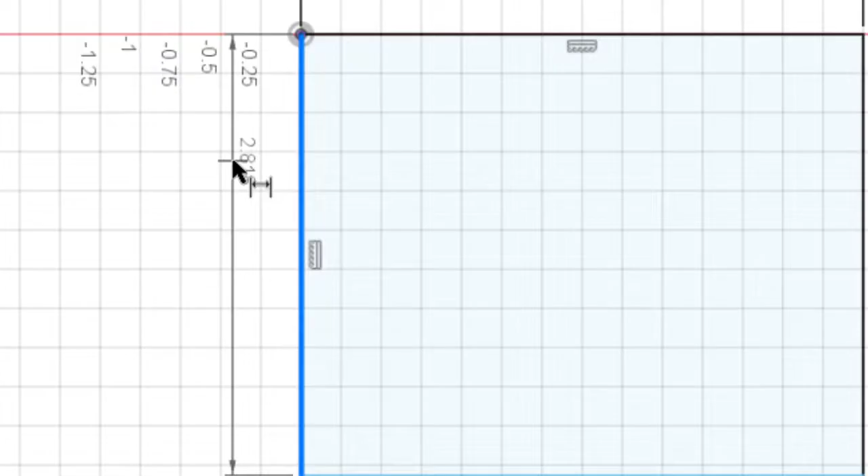I am actually going to start on the bottom, and we've got us a rectangle here. I'm going to kind of go back and forth with these drawings. Ours is going to be a little different because it just fits better for us. So it's 3.5 by 3, and everything's going to be 1/4 inch thick. So 3.5 by 3. So I'm going to hit the D key for dimension. This is 3.5. And then over here is 3. And I know I can extrude that, right? I can extrude it to be 0.25. All right, so there's that bottom piece.

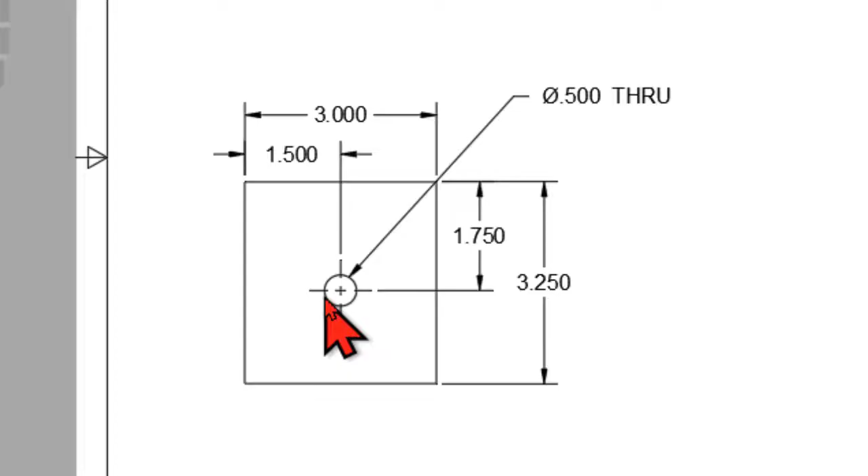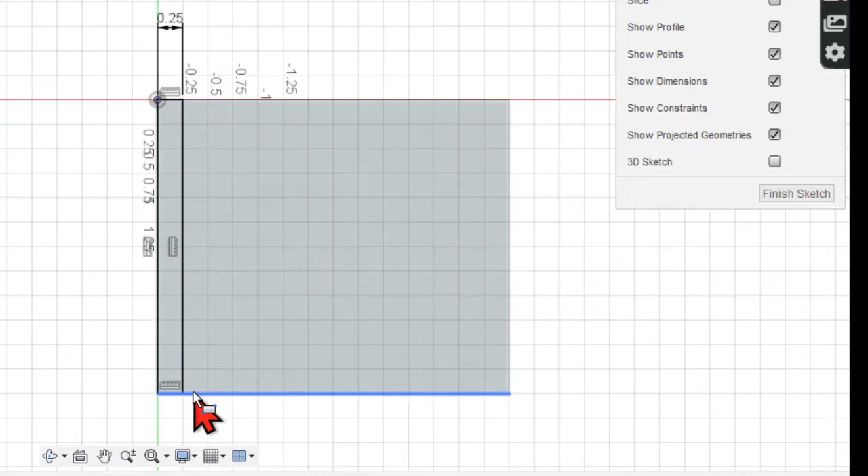All right, so let's take a look at the sides. So I think down here I've got the drawing of the side. It looks like it's 3 by 3.25 with a 1/2 inch circle, kind of centered there. So 3 by 3.25. So I'm going to say new component, right? And I'm going to say side. And now I'll come over here and I'm going to sketch. We've already got that side taken care of, right? So we knew that was 3. And then this will be 0.25 thick. Okay, and then I'll extrude this. Let me rotate that so it does a little bit better for us.

And on this we said, let's go back to that drawing there. We said 3.25. Let me edit that extrusion and say 3.25. Alright, now I'm going to put the hole in. So I go up here to hole. Alright, so let's look at the drawing. It says 1.75 from the edge and 1.5 from that edge.

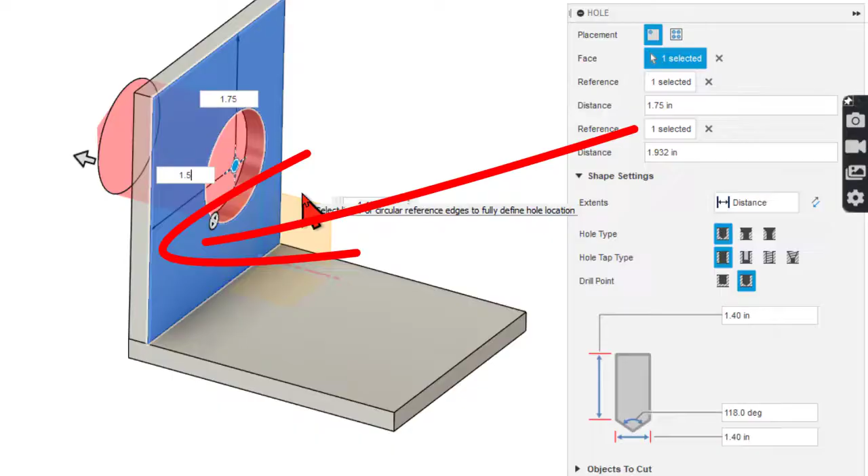So here's the hole. We know from this edge it's supposed to be 1.75. And then from another edge, so I'm just clicking reference. From there, that should be 1.5. And the hole itself, the diameter of that hole, which is right here, instead of 1.4, which they've given me, I need that to be 0.5. Right, and then I'm going to hit enter. And that side is taken care of.

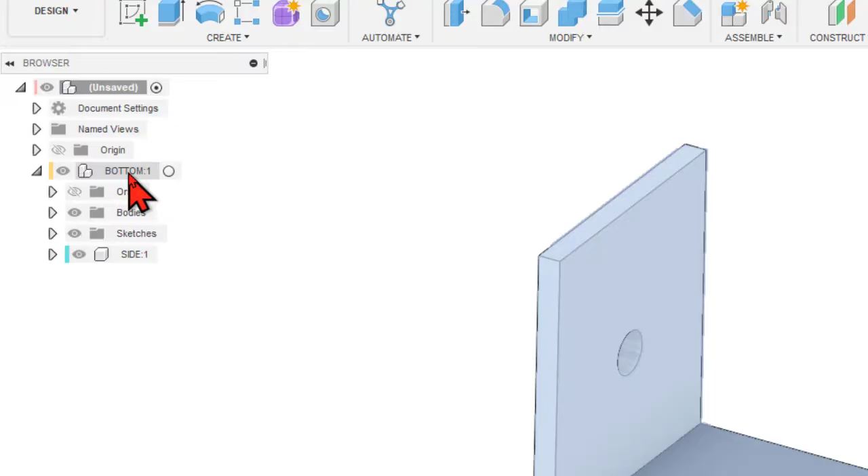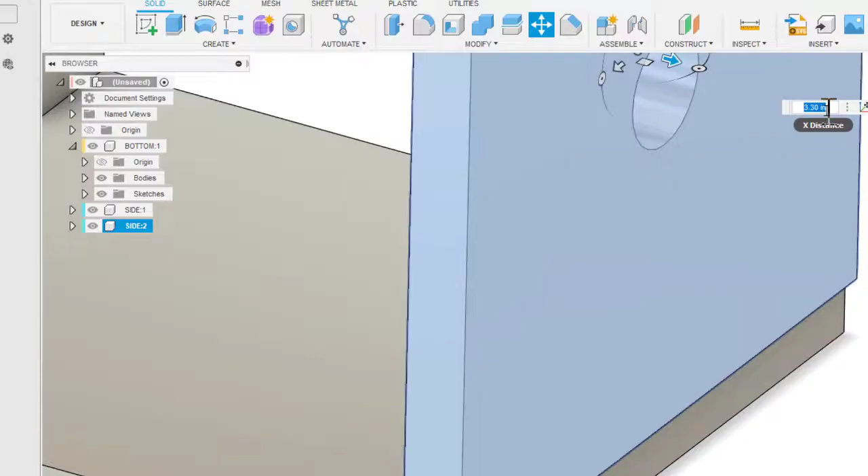So I'm going to go back up here and I'll get the whole parent view. Now look at that. Side came in under bottom, didn't it? So I'm going to click and drag that up here. Now this side, I'm just going to go ahead and right click on it and say copy. And I'm going to right click and say paste. I'm just going to kind of drag this out and put it in position. I'm going to kind of line it up with the edge. That's 3.3. If I go back, it's 3.2. So this must be 3.25. Yep. And I'll hit OK.

I'm going to do one more new component, and I'm going to call this the top. So there's the top. I'll do new sketch here. And I'm going to just drag the rectangle across and make it meet in the corners. And I'll extrude all of this. And that also will be 0.25. Now we do have some holes in here, so let's check that drawing out. It looks like 0.75, 1.75, and 2.75, and then they're centered. And it looks like they're just 1/2 inch holes through. So I'm going to go ahead and take care of that.

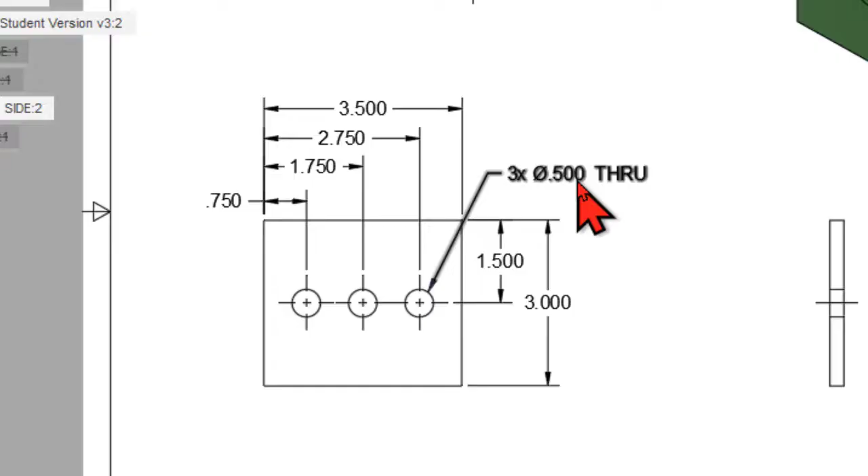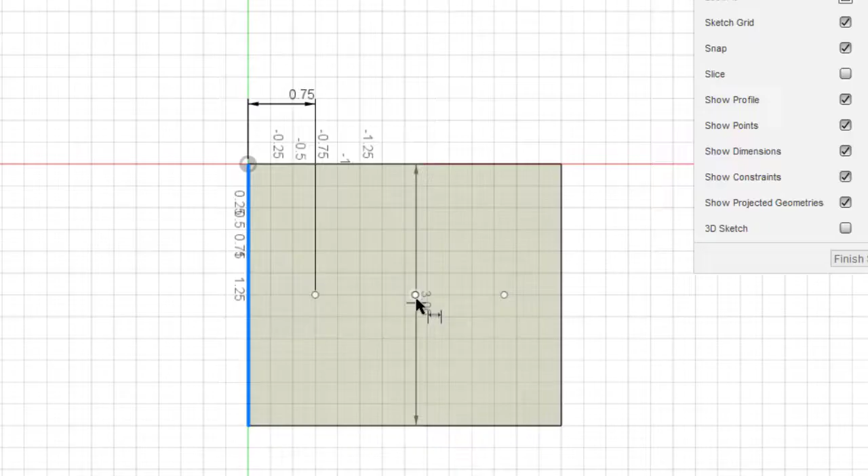I'm going to do this just a little different. I'm going to go into sketch, and I'm going to create, and I'm going to say point, because I'm doing several at the same time. I kind of find the midpoint, and I know that they're just in here, right? I know from the drawing it says from this edge to this edge was 0.75, and then from the edge to the center one I think was 1.75, and I always forget that last one, but it looks like 2.75.

So let's go ahead and take care of that as well. So I'm going to go from the origin over here to the dot, and that'll give me 2.75. So all of those are set. So now I'm going to hit finish sketch and I'll go to hole.

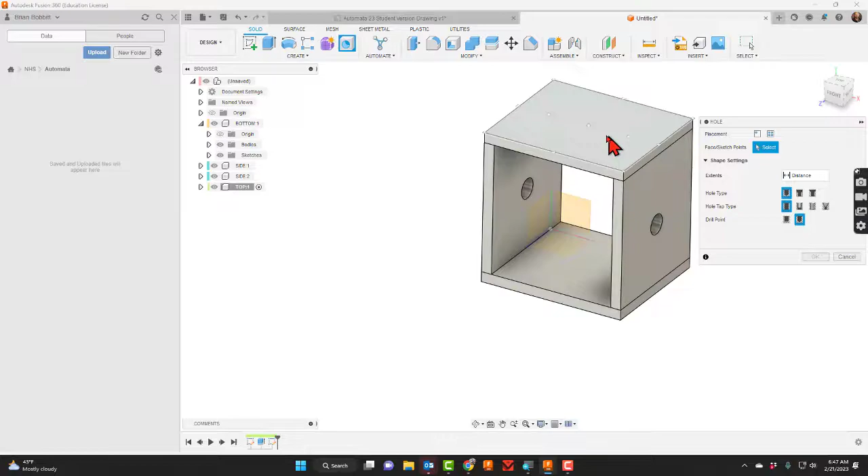Now the nice thing is I can click all of these at once and set them to 1/2 inch. Now really on our depth, the main thing is that they go through, right? And I'll hit OK.

Now I'm going to go up here to the very top where it says unsaved, and I'm just going to highlight everything. Okay, so right now I want to show you this. Everything is going to move, right? Because we never did joint anything. So I'm going to undo that, and I'll show you a neat little trick.

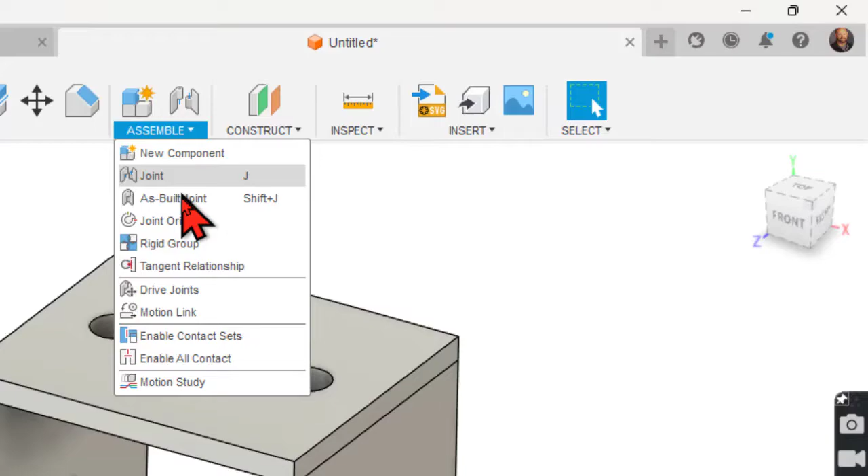I'll go up here to Assemble, and I'm going to say As Built Joint. We're used to going to joint, but here's As Built. It only will let you do 2 at a time, to my knowledge. Hit OK. I'll go back up there and say As Built Joint again, and I'll say here and here. So I'll get those 2 corners. Okay, now if I drag it, see that side will move and that side will move.

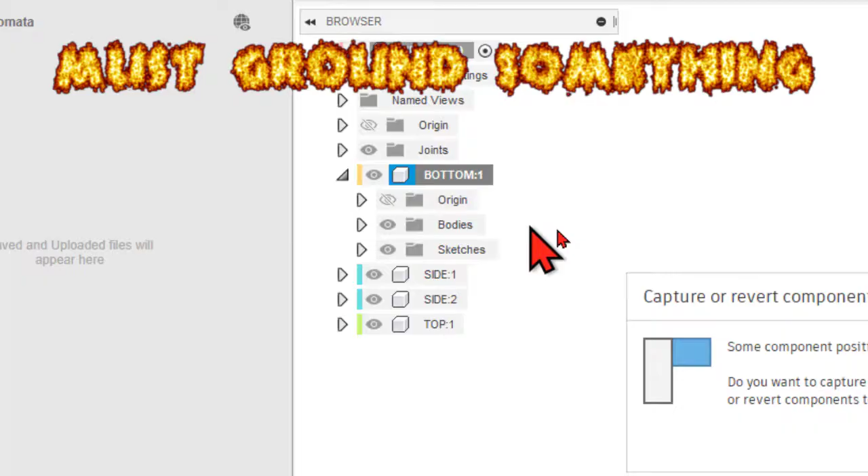So close, right? I'm going to put one more in, and I'll say As Built Joint. Let's do here and here. And just to be for sure, we'll go here and here. All right, now before I get going crazy though, I'm going to take the bottom and I'm going to ground the bottom. Okay, so now nothing's going to move that's attached there. And let's go ahead and start working toward getting some other pieces in here.

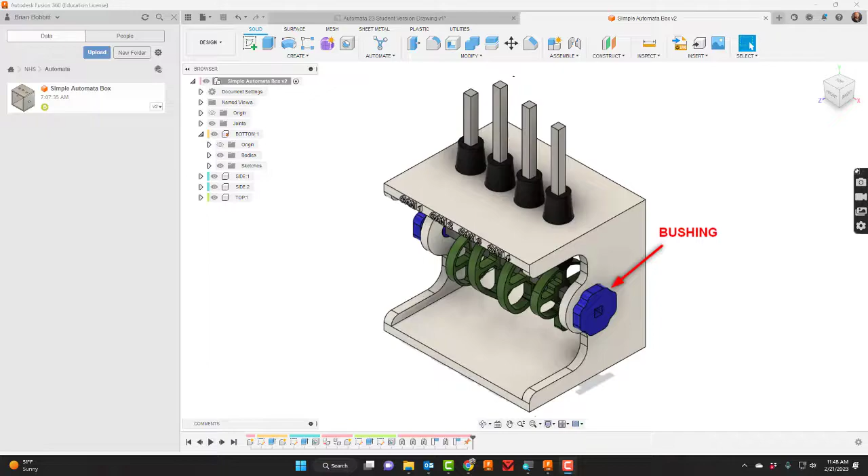Let's go ahead and demo how to do the bushings. Those are the knobs that are on the side of it. So I'm going to say new component, and I'm going to call this the bushing. I might just call it the bushing / knob, because I'm going to combine these two to make it a little simpler process. So I'll go ahead and do the new sketch thing. And I'm going to come in here, and I'm going to actually use the circle that's already there.

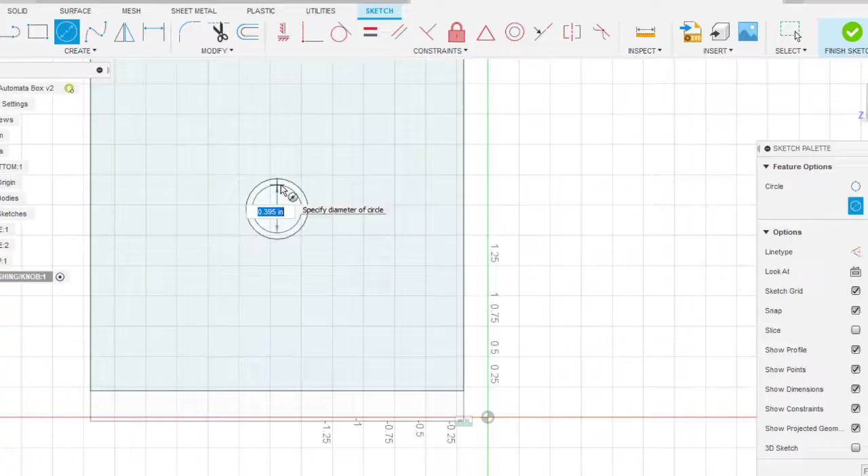Now, because in reality, I know that I'm going to 3D print these, I want it to be slightly smaller. I need to have some clearance. I know that that hole is 0.5, so I'm going to actually type in 0.5 minus 0.03. And that should give it the clearance we need. That 0.03 could be different depending on the printer, right?

So I'm going to extrude that. Let's rotate it so we can see it. This actually needs to go this way, doesn't it? And it would need to go negative 0.25. And that would fill the gap. And then I'm going to come out here and I'm going to sketch a little bit more on the top. So now I'm going to create that knob piece.

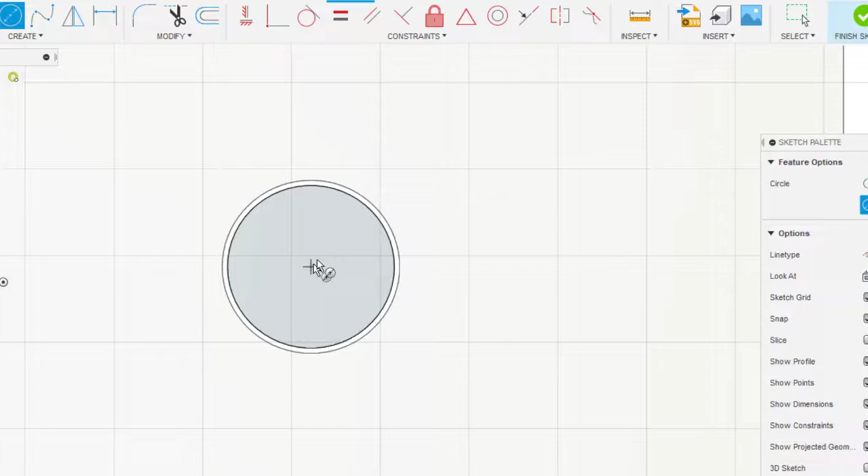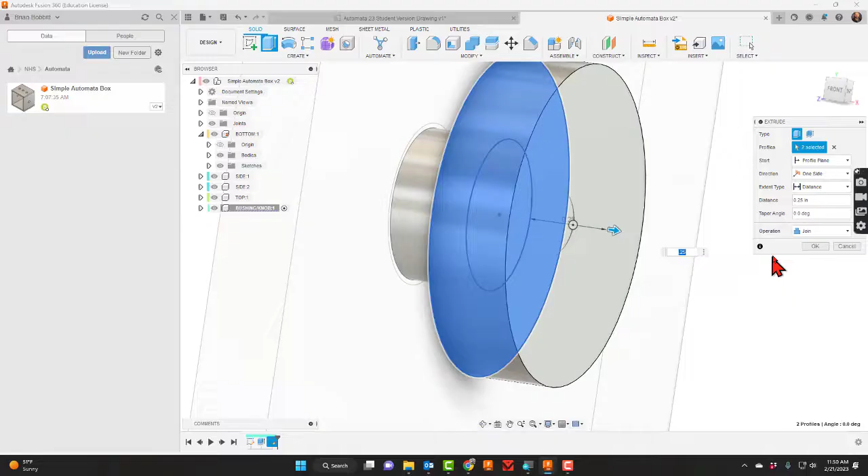So here I'm just going to try to keep that. Let's make it like 1 inch. I believe that ought to get it. And I'm going to collect all of these circles here. And let's make that maybe, what, 0.25 thick? Something like that. Go ahead and hit enter. Right, and now I think what I'll do is I'm going to go back in there.

I need to put a square hole through there. So I'm going to go to create and I'm going to say rectangle, and I'm going to say center point or center rectangle. So I'm really going to find the center of this again. Now again, this should be 0.25 by 0.25.

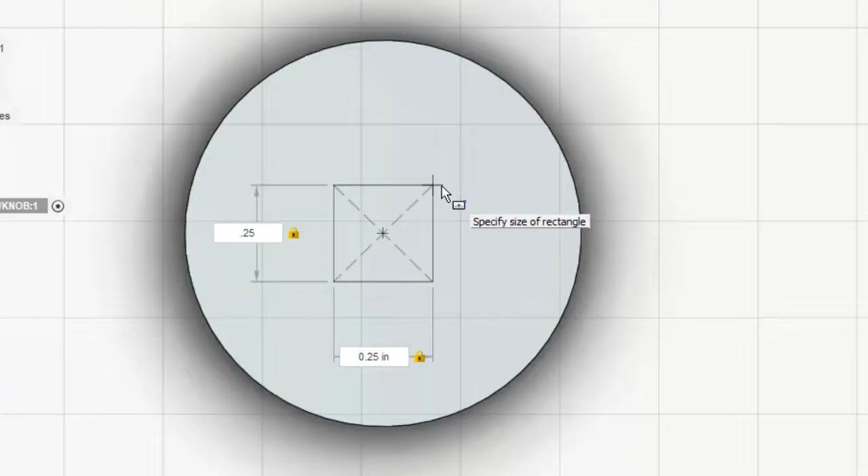Right, that would be perfect in a perfect world, but we know with 3D printing things can swell a little bit. So I'm going to say 0.25 plus 0.02. Then I'll tab over and do the same thing here, 0.25 plus 0.02. And that'll make it slightly larger so that everything should pass through. So what I'll do now is just extrude it, and I'm going to cut it all the way through. Okay, so there is a bushing.

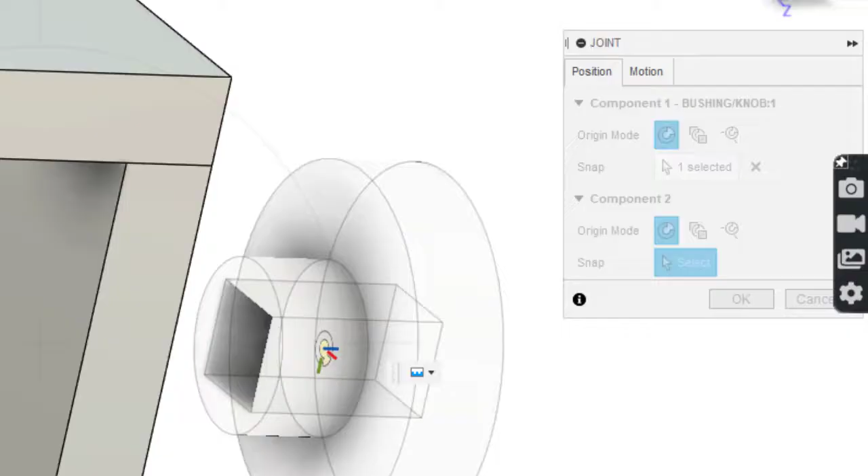I think I'm going to go ahead and pull this out. I'm going to joint the thing. So let's go ahead and go up here to joints. And I'm going to get the center of that and put it on here. Okay, on this one, I'm going to go ahead and change this motion over to revolute. So that allows it to spin.

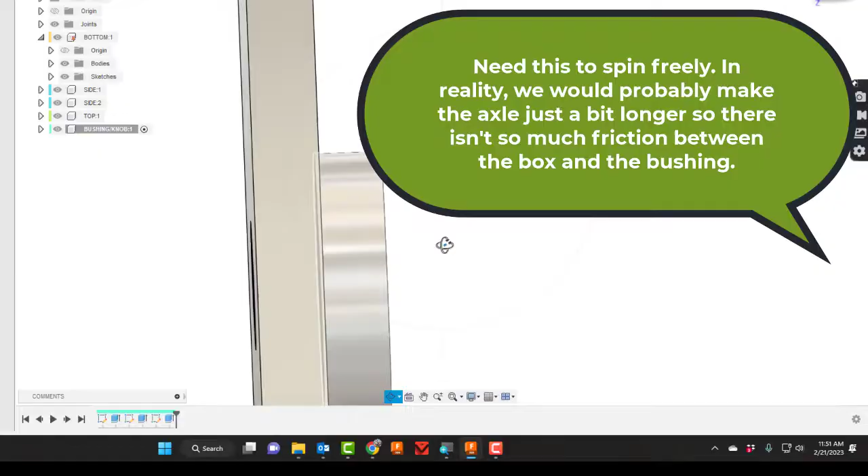So I've got that. Now, if I'm looking at that, probably should leave a little bit of clearance. But in reality, what's going to happen is because we have a wooden axle running through here, that's going to have a little bit of play to it, and we can back that off, or we can pull the knob out some.

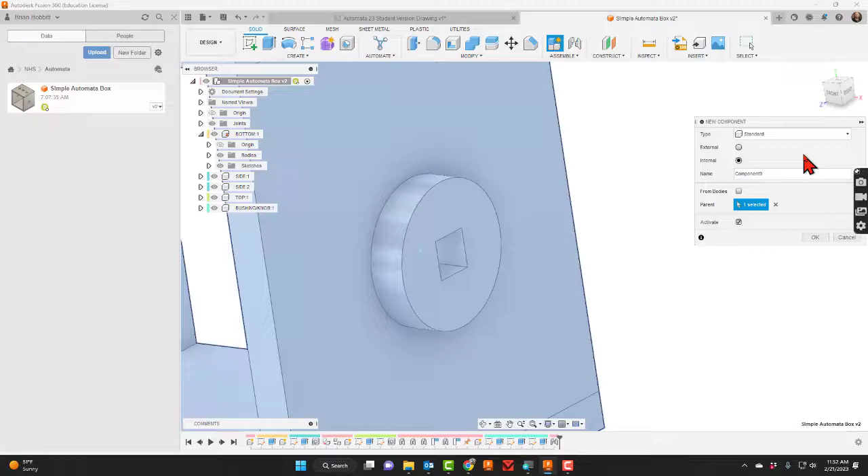All right, let's go ahead now and create the axle. So I'm going to make sure I've got the whole assembly right. So I'm going to go back up here, and I'm going to say new component, and I'm going to call this one the cam axle.

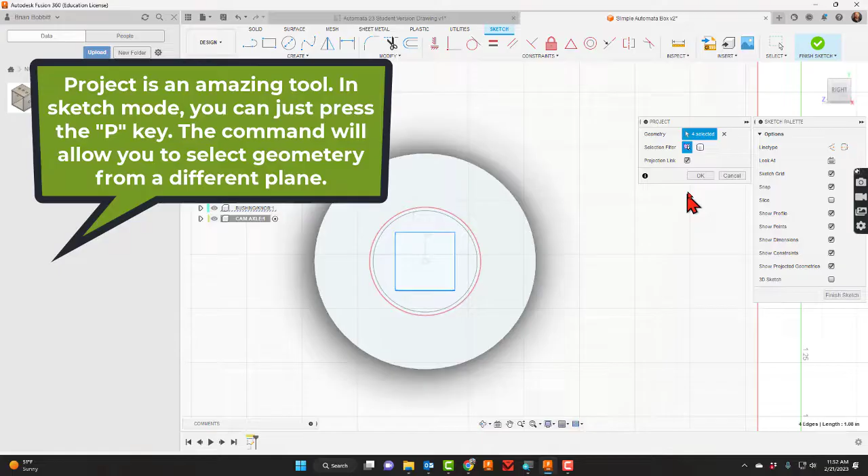New sketch, and I'm going to sketch on the outside of that knob. And on this one, I'm just going to hit project and use the square that I've already used. So I can either go up to create and choose project, or I choose to press the P key, and I'll hit OK. And all I've done is just select the lines that were on the square.

So now I'm going to extrude that shape, and I'm going to go all the way to the other side. So let me square it up. There's the front view. If I drag this arrow, that's perfect at negative 3.75. I need to remember though that I have to add that extra 1/4 inch, right? So let's make that -4, because I'm going to also have another knob over here, aren't I?

Go ahead and go back up to the entire assembly. I'm going to go back up here to assemble and say as built joint, and I'm going to click the knob here and the axle and just keep that as rigid. So now when I turn this, you see everything is going together, right? The circle is turning, the axle is turning.

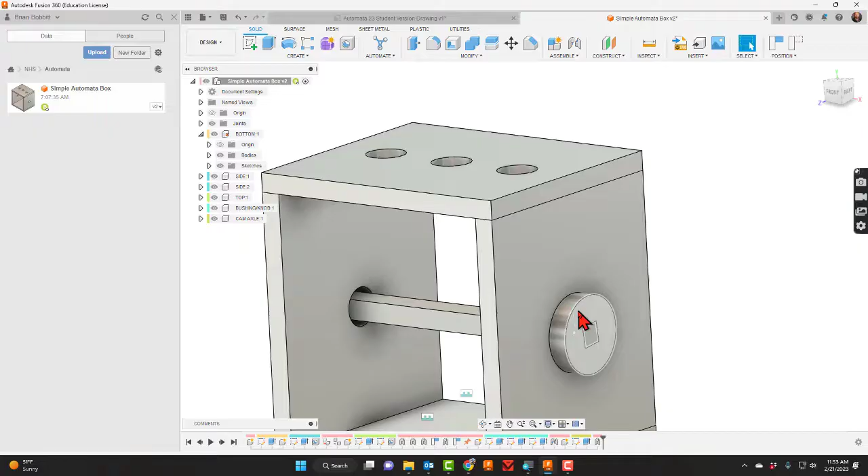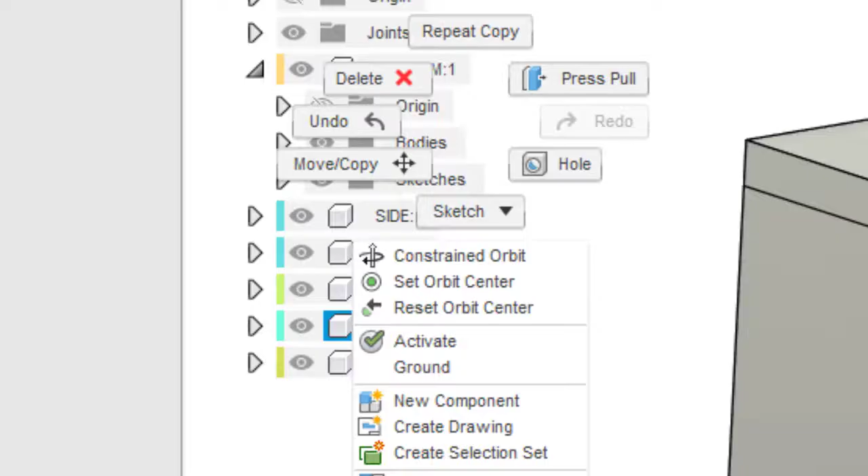Okay. I'm going to right click on this joint, and I'm going to say go to home position. So that'll reset it. While we're here, let's go ahead and put the other bushing handle on there. Right here, there's the bushing knob. I'm going to right click on it and say copy. And I'm going to right click and just paste it. And I'm going to pull it out over there. And I'm going to joint it.

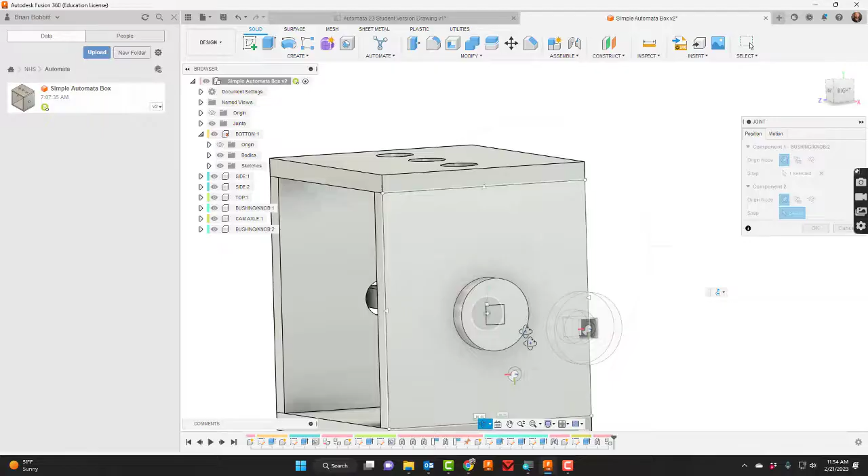I'm going to put the end of this, so right in here, if I hit the control key, remember that'll leave it up. And I can select on that central button there. So there that is. And now I'm going to rotate it to the other side of the axle. And click there. Now I need to flip it. Now I don't know if you noticed, but on the motion, that thing was turning. So let's go to motion, and instead of revolute, let's make that rigid. So I'm going to hit OK now.

And now I'm going to come over here to this knob and I'm going to turn everything. So you'll notice when I turn that this knob over here is turning as well.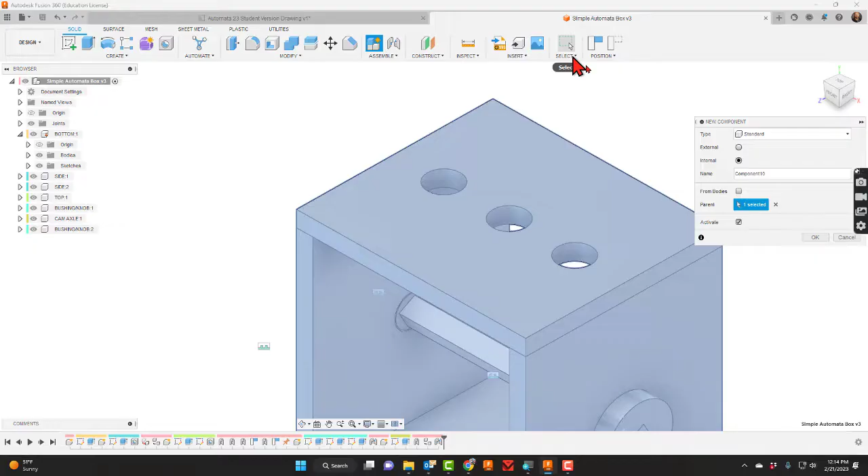So next up in the process is to put the guides up here on the top. So let's go ahead and get those drawn in. First thing I'm going to do is say new component, and I'm just going to go over here, type in guide. Okay. Now I'm going to come to the top and start a new sketch, capture the position. This was going to be a relatively snug fit, but let's go ahead and make that dot.

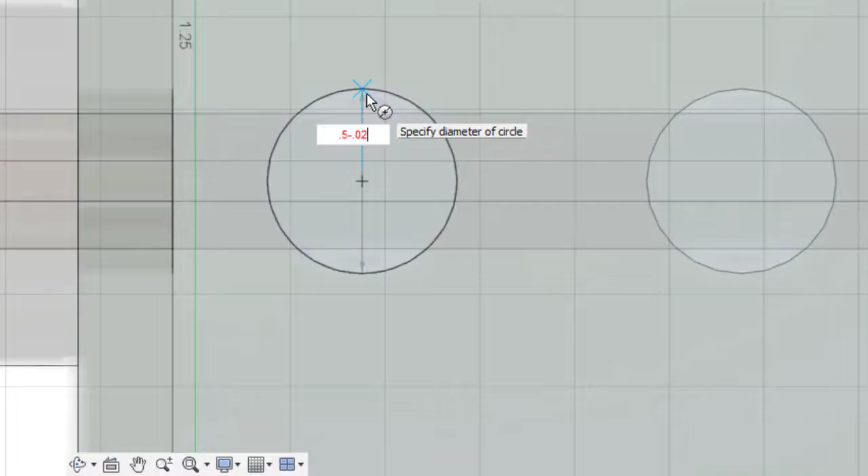Now remember, again, this is probably going to be another 3D printed piece. So instead of 0.5, I'm probably going to say 0.5 minus 0.02. Okay, just a little bit of tolerance there, because we do want this to be rather snug. So I'm going to hit extrude now. And we'll click there, and we're just going to take it down through the top, right? So that should be negative 0.25.

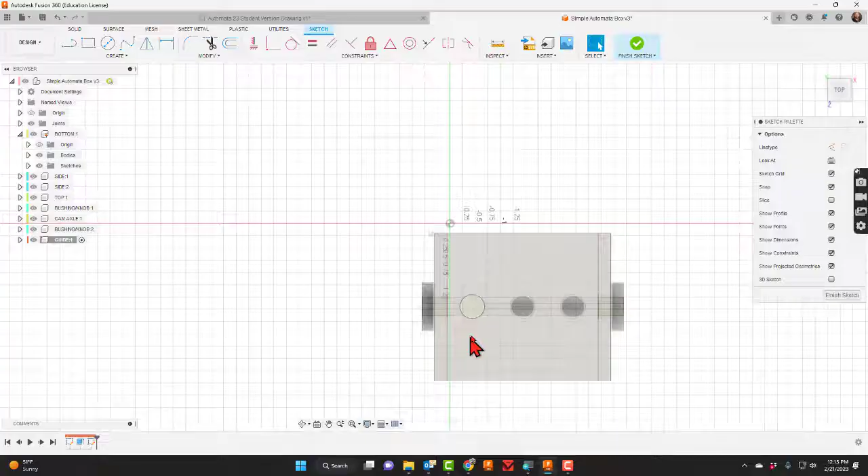I'm going to come back up on the top of that. And I'll draw one more circle here, and that one needs to be slightly larger. So let's make that 0.75. And this is where things can get a little tricky here. We're going to make a loft here.

So I'm going to finish the sketch, and I'm going to grab a plane up here. And I'm just going to click on this shape, click and hold, or click, and then I'm going to drag this up to where I want it to be. Let's make that a 1/2 inch tall.

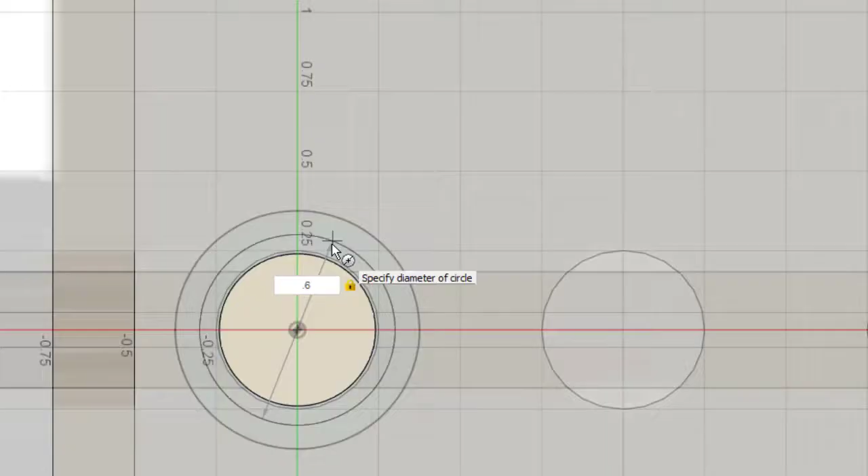So just to show you where we're at here, I'm in a separate workspace or a work plane. Now I'm going to go to sketch on that new plane, and I'm going to put another circle up here. Now I need these to be numbers that are usable. So like the 0.585, let's try like a 0.6 here. And then we'll hit finish sketch.

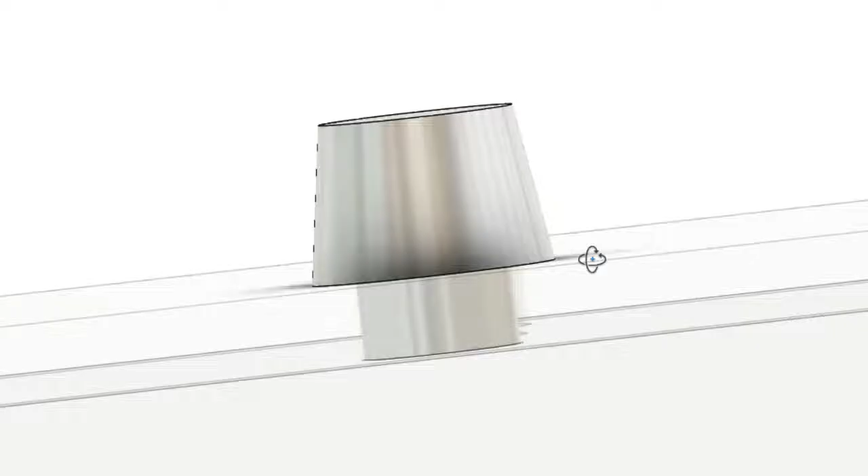So now I'll go to create, and instead of extrude, I'm going to go to loft. So I'll click here and then up here, and that will give me that lofted shape. The nice thing is when I 3D print that, I'm probably going to 3D print it upside down. So in other words, this would be the bottom. Okay, and what that'll allow me to do is 3D print it without supports.

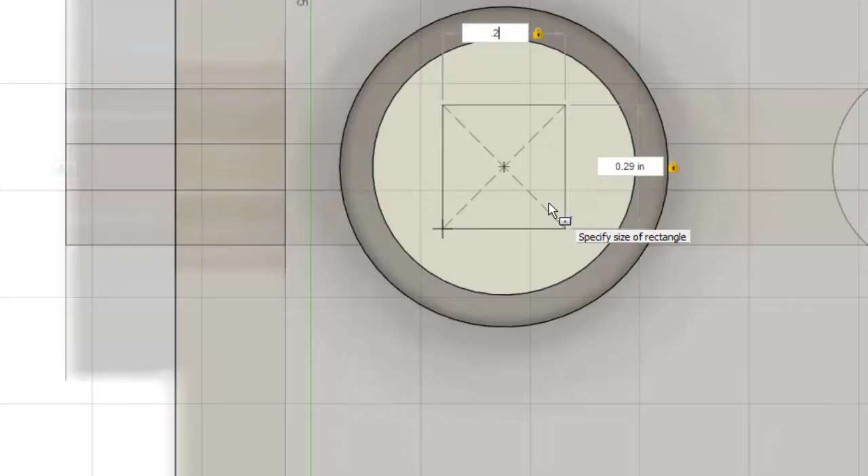So now I'm going to come in here onto the top, and I'm going to use that center rectangle. So rectangle and then center rectangle. I'm going to find the center of the circle again. Now we know that the wooden dowel rods are 0.25, so this joint in particular needs to do some sliding. I think I'm just going to jump up to 0.29 on both of them, because it's okay if we have a little extra clearance here. Remember, we really want that to be free.

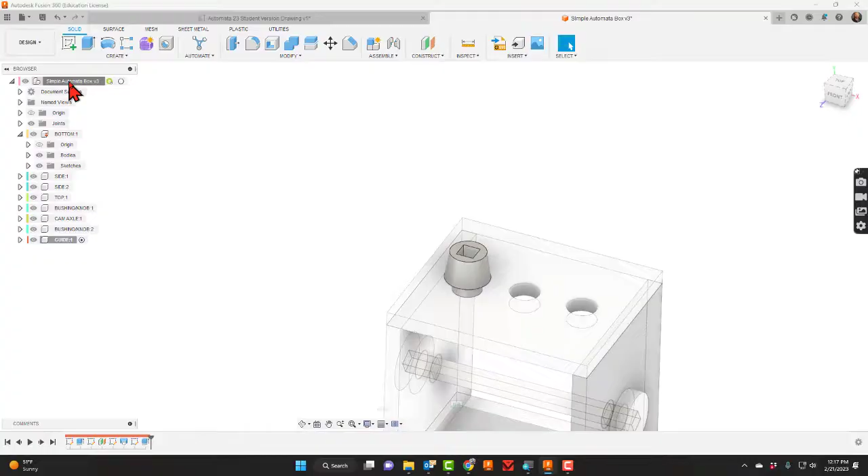So now if I come in here, I can say extrude. I'm going to take it and go all the way through that shape. I'd say 1 inch ought to get it. There it is. So I'll go ahead and get back up to the entire assembly. And I think what I'll do now is I'll go ahead and go to Assemble and say As Built Joint. So I'll click here and here. And that should be good. So this is not going to move.

I think from here I'll go ahead and copy that over. So copy. And then I'll paste again. Just kind of scoot this over into its place. Let's rotate that and see how it looks. It's a little bit off, isn't it? So let's go ahead and move it over. That looks good, and hit OK. Again, I'll go up here to Assemble and say As Built Joint, and click here and here.

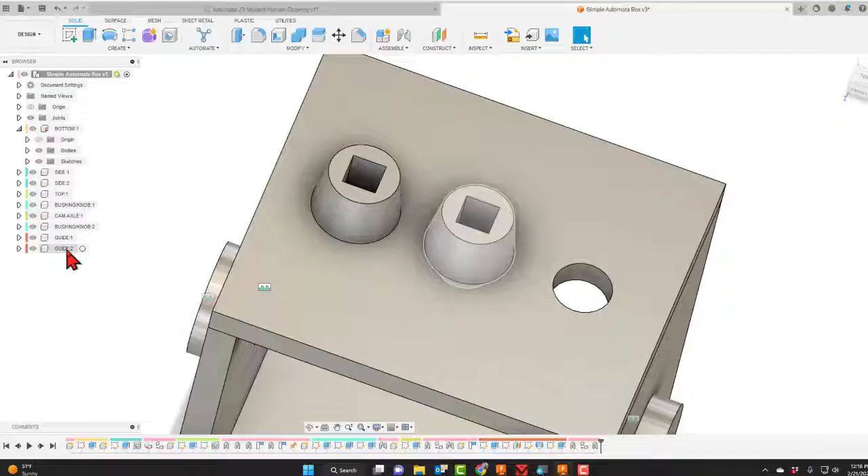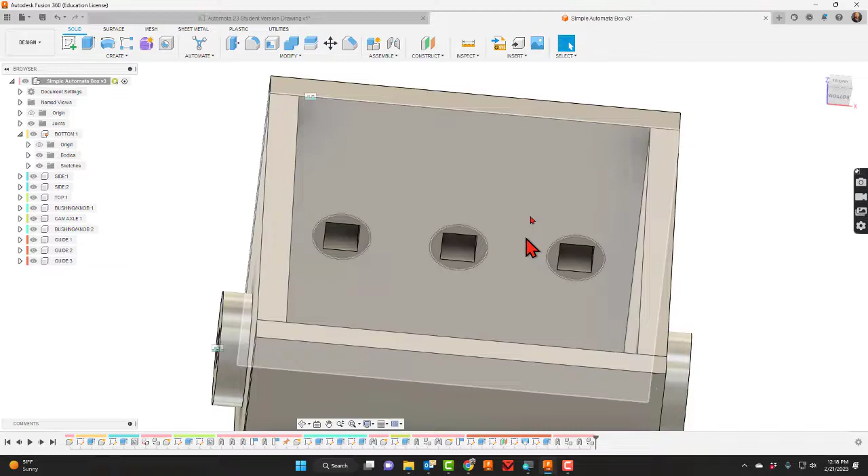And do one more. So I'll come here and copy it. And I'll do one more paste. Right click and say Paste. And just scoot it over. It looks like every inch ought to get it. After I move it over the inch, I'll just hit OK. I'll go ahead and join it. So Assemble, and then say As Built Joint, click that, and click that, and then you're good to go. So now that takes care of the guide process.

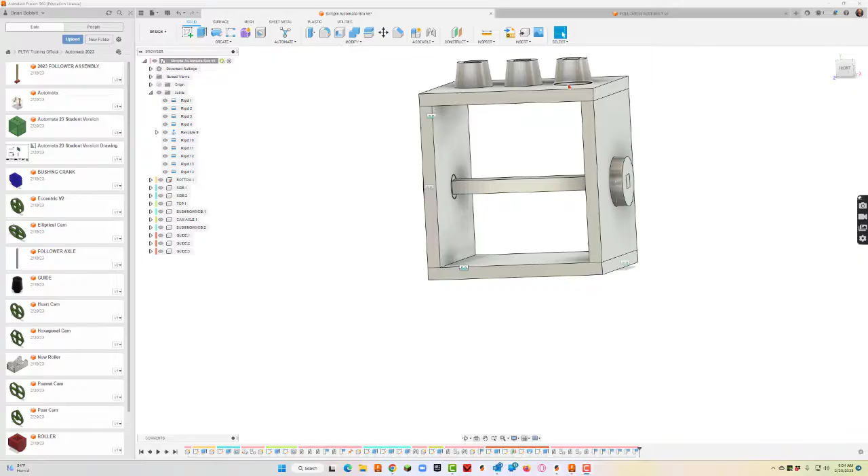So next up in the process, we're going to start to put our follower system in. So we're going to put an axle through here and a little follower at the same time. So let's take a look at how to do that. Alright, so we're going to come over here and we're actually going to start our parts out here separately. So I'm going to say new component, and I'm going to call this the follower axle.

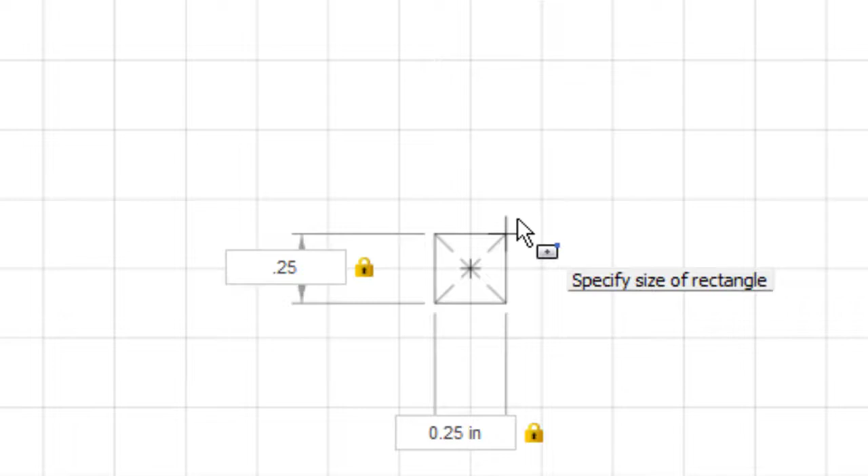Come out here with a new sketch somewhere. Let's try to keep them separate. So I'm gonna go to rectangle. I like the center rectangle, and let's make it 0.25 by 0.25 because this is gonna be a wooden axle. Let's go with like 3 inches on that. All right, so I've got one piece taken care of. Now I'm gonna put like the follower tip on there. So this is what the cam is actually gonna roll on.

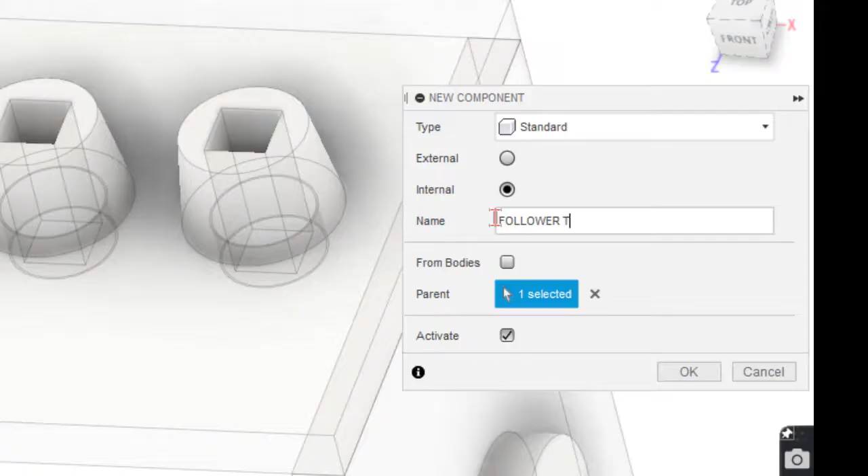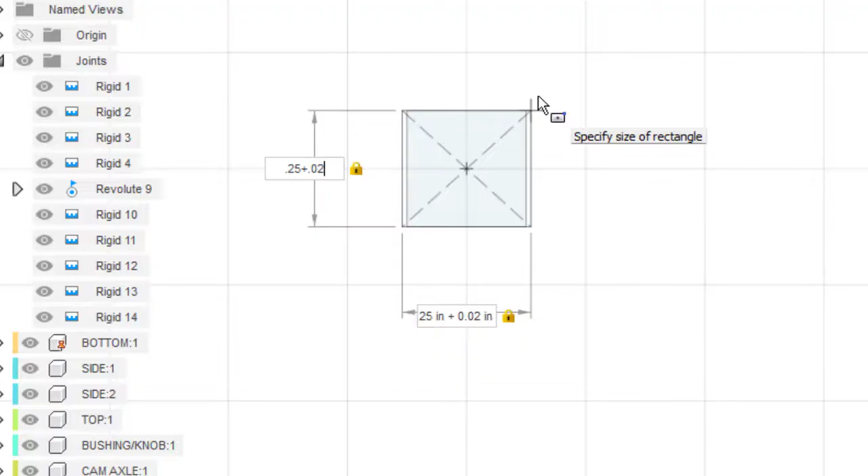So this is going to be another new component. So new component, and let's call this one the follower tip. So I think I'll start right here on the end of it. A rectangle that's slightly larger. And another thing I could have done is use the offset here. So I'm going to say 0.25 plus 0.02. And I'll go back up here to the other one. So tabbed over. The same thing, so it's going to be slightly larger. That's kind of a big deal.

Now I am going to use an offset, and I'm going to go off of the square I just made. I'm going to go with like a 0.1. Hit enter. I'm going to extrude that and take it up a little bit so that it wraps around that. And it's got to go up there a little bit. I'll say just like 0.2 is fine. Now I'm going to hit sketch and come back on top of that.

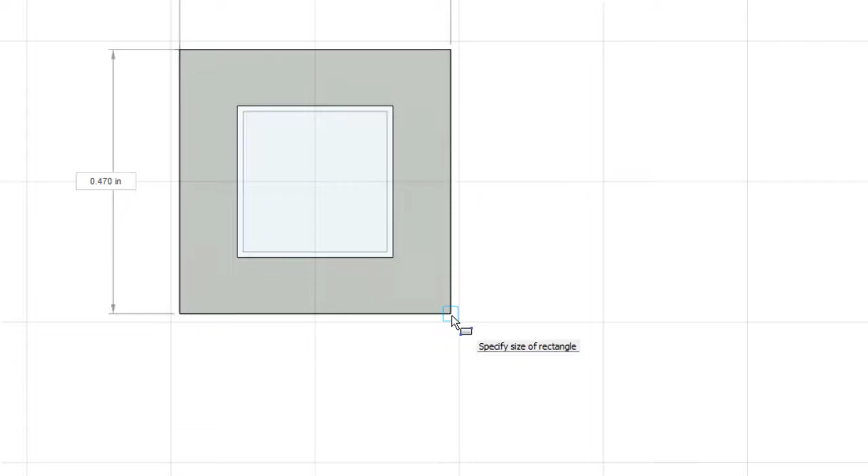And let's draw just a rectangle here across the whole thing. And now we'll extrude everything up here. So let's drag this out some. I'm going to go with like a 0.2 here as well. Now what I'm going to do is I'm going to fillet. So I'm going to choose my fillet tool and come get this corner and this corner.

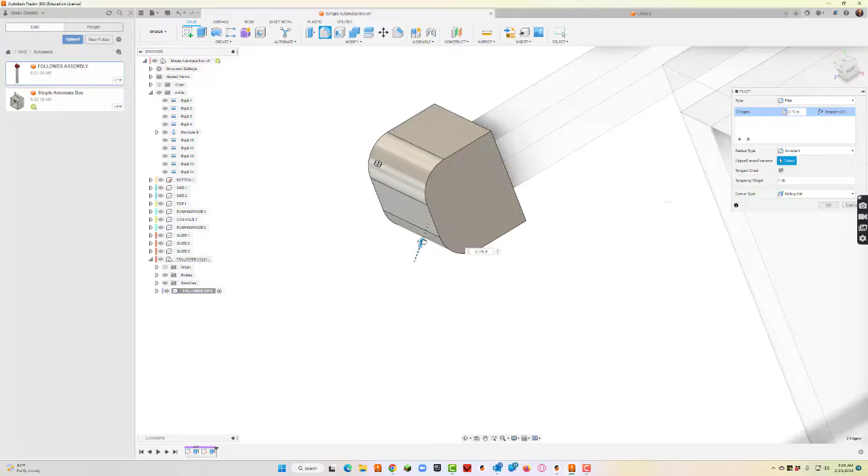Just kind of push those in as much as I possibly can. I really want that to be round. Looks like as soon as I go from 0.225 to 0.25, it gets really nasty. So let's try like 0.235.

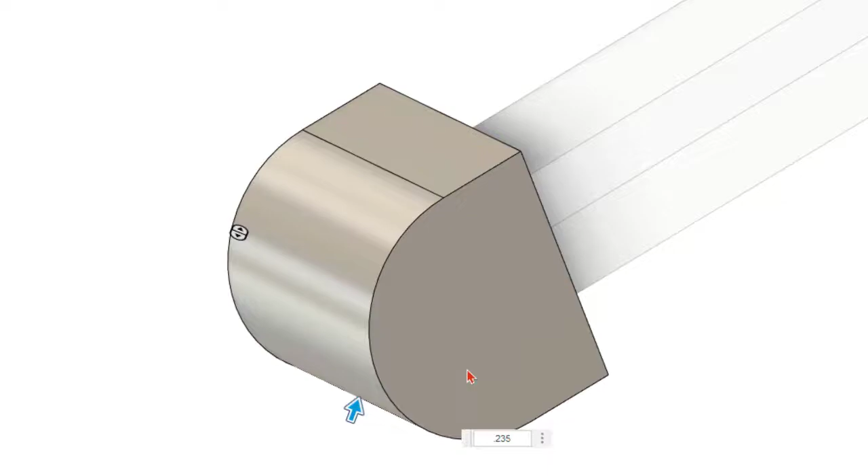That actually works really perfect. I want that to be round, so I'm going to hit OK. And also while I'm here, I'm going to go ahead and make this a different appearance. This kind of helps me here because it's going to start getting pretty convoluted pretty quickly. So I'm just going to drag like a red over there and close.

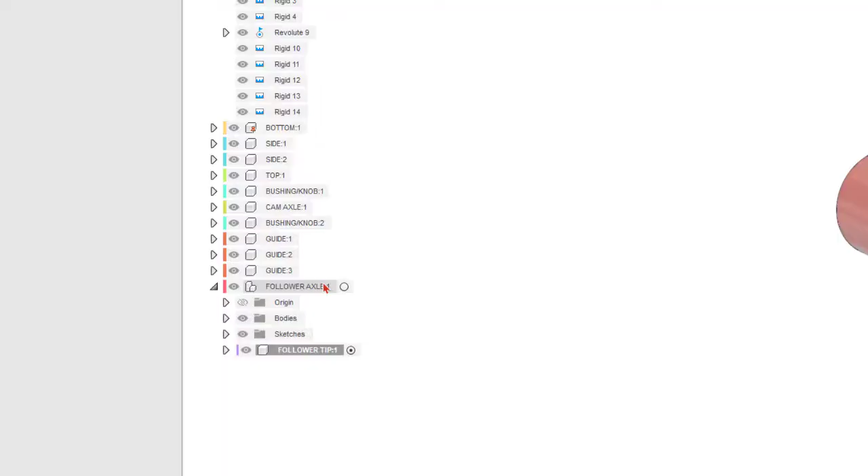Now, before I move on, I want to come up here and get to this assembly here. And I want to go ahead and do an as-built joint. So I'm going to click the tip itself and the axle. Hit OK. And now these two pieces are together. So this is an actual assembly now.

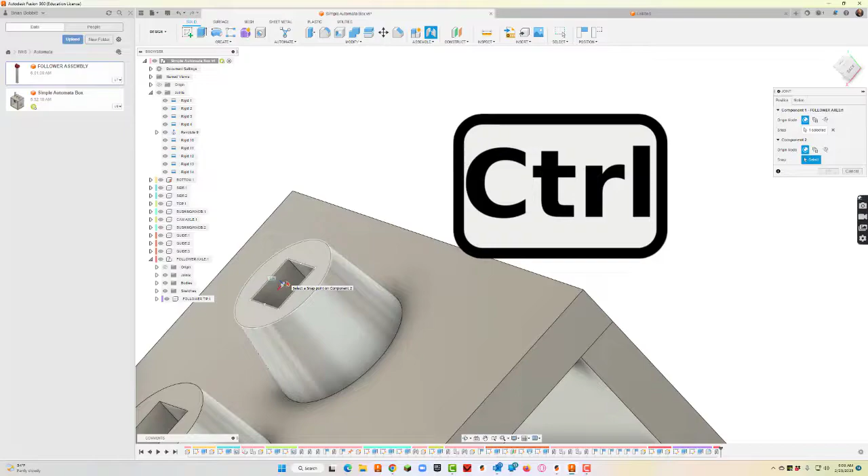I'm going to go ahead and activate the entire automata now. So I'm in here, and I'm going to put a slider joint in. So I'm going to go up here and choose joint. I'm going to pick the end of that, and I'll come up here to the guide. Probably have to hit the control key, but there it is. Go over here to motion, and I'll choose slider. That's actually moving the way it's supposed to.

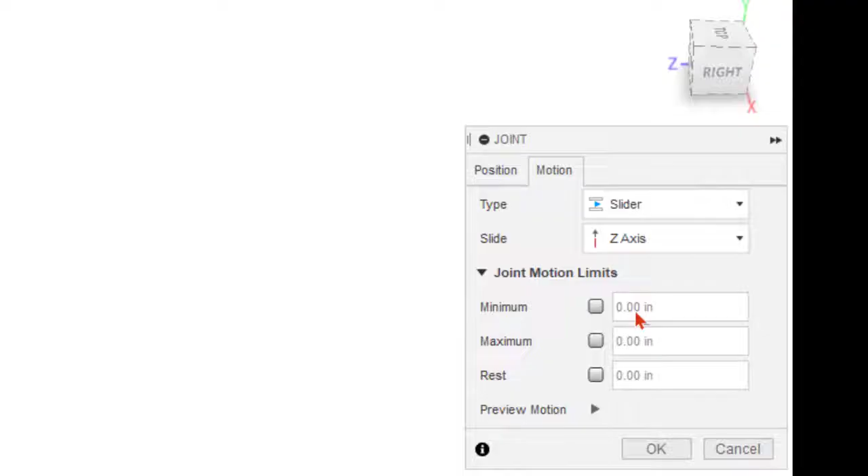See, it's moving vertically. If it comes in like this, where it's going across or this way, I just need to go up here to slide and change the axis. Okay, so there it is. Now I hit that, and you notice that that thing is upside down, and that's okay. Let's fix that. So it's going to be the last joint we put in, right?

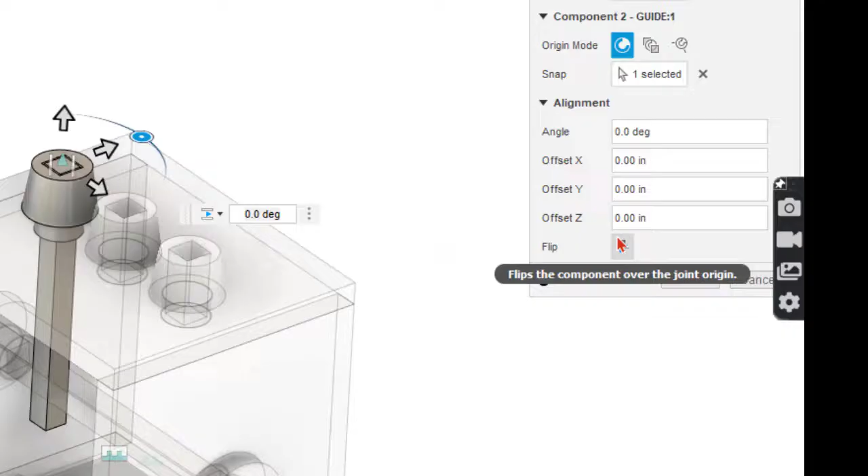Here's the slider. So here's our joints. Here's slider. I'm going to right click on that and say edit it. And what I need to do is just flip it. So just flip, and hit OK. Now if I take a look at that, it's moving the way it's supposed to move.

Alright, so let's take up from here. We've got our follower axle and our follower tip system in, our guide tip, whatever you want to call that. Now we're going to actually put a cam in here. So let's do that. Let's go over here. I'm going to say new component, and let's do an eccentric cam. It's pretty simple to do. We'll start over here with a new sketch. So I'm just going to kind of draw it out here.

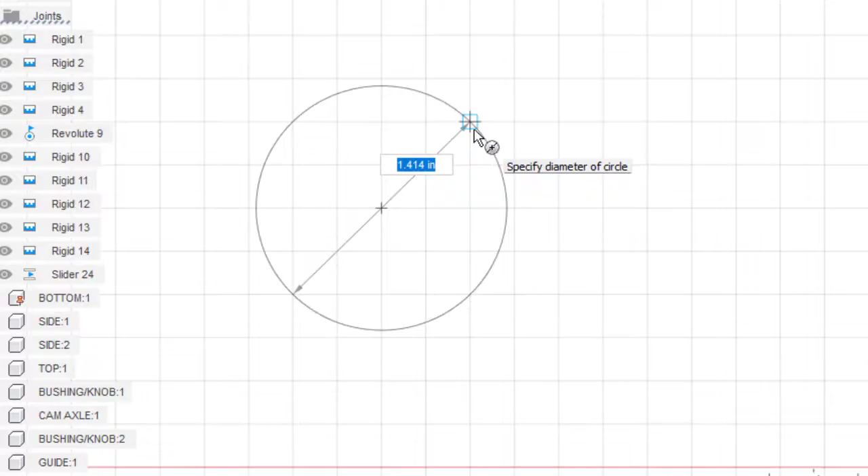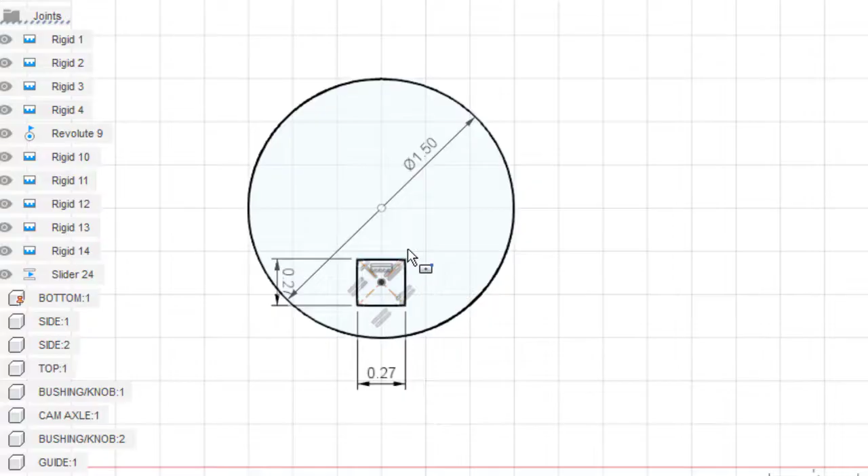For our cam, I think I'm going to make the nominal diameter be 1.5, and then I'm going to use the center rectangle. I'll come down here somewhere. Now this needs to be slightly larger, so 0.25 plus 0.02. And again, those numbers change depending on the printer. Ours is a pretty snug fit, a press fit, or an interference fit as we call it. For us on our printers, it's 0.02. Other people, it's 0.03. And then if we want clearance, it could be a little larger, right?

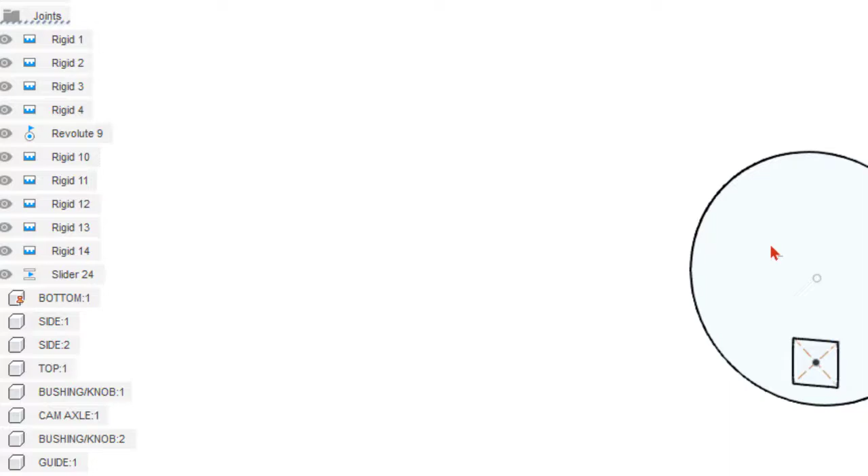Alright, so I've got the sketch made of the basic eccentric cam. Now I'm just going to hit extrude. Then we'll make that 1/4 inch thick. While I'm here, I guess I'll go ahead and change the appearance of that. Just add a little color to it. So let's do like a blue here. Okay. Now I'll go ahead and activate the entire assembly. So this is kind of the pattern that these will follow now.

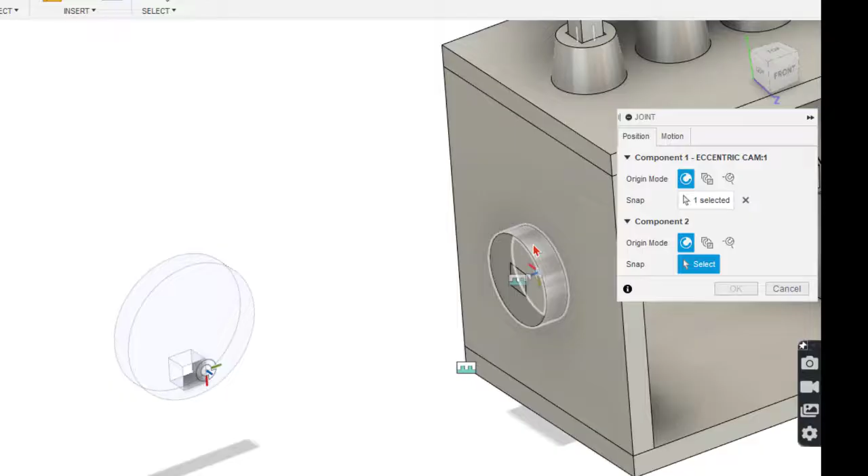We're going to go up here to assemble. We're going to choose a joint, and I'm going to come over here, and what I'm trying to do, I just want to get the center of this. Sometimes this will play nice, other times it won't. So what I'm trying to do is hit the side of this. So there's a dot, and then I'll come over here on the axle and try to get a matching dot. Make sure it's flat. So that goes on there.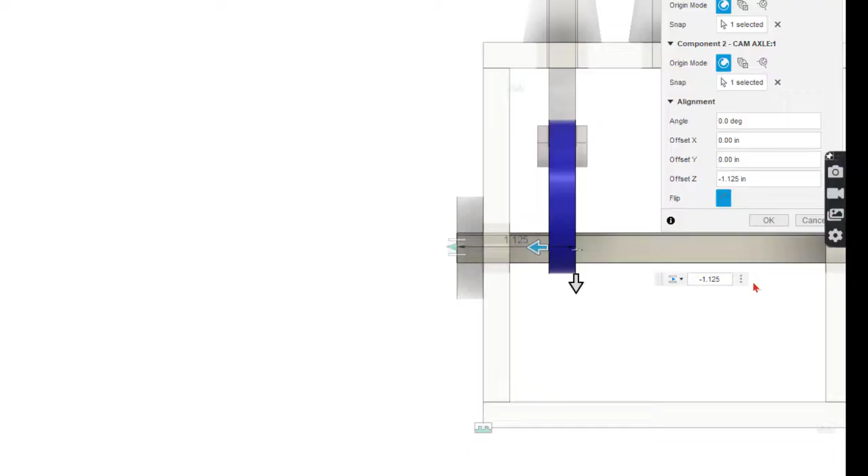Now it's still set to slide. That's okay, we'll fix that in just a minute. Right now we're going to slide it on down though. So I'm going to turn to the front view. And all I'm doing right now is just putting it in position. So negative 1.2 is too far, negative 1.1 is not far enough. I'm going to try like 1.125 maybe. Yeah, that looks pretty good. So negative 1.125. Now I'm going to change the motion.

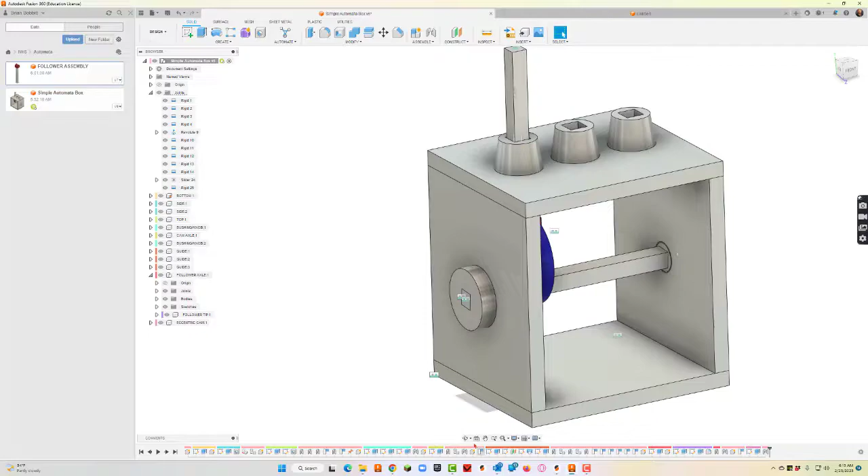Instead of slider, I need this to actually be rigid. I know you're probably thinking, why am I making it rigid? Doesn't it move? And it will move. But it's going to move based on this revolute joint. So rigid it is.

Okay, so now if we go over here and we kind of animate our revolute here, you can see it turns. Now it's not making any contact here. Well, it is. It's going through it, right? That's not a natural movement. If we take a look, let's go ahead and take our revolute joint here. I'm just going to right click on it and choose go to home position.

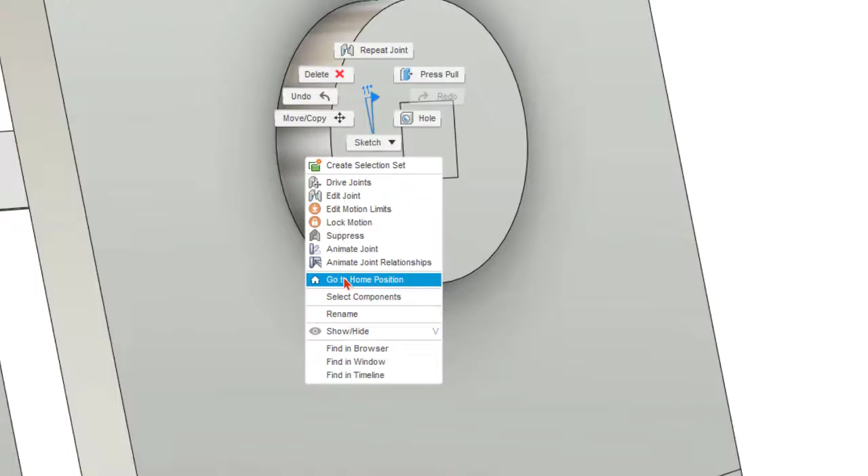Now let's put a relationship in between here. So we're going to go to assemble, and we're going to see tangent relationship. So we'll click there. And now we're going to click the edge of the cam and the bottom of the follower, the curved part of the follower. We'll click that, and now we'll hit OK. So now if we spin this, look at that. Now this thing is animated like it's supposed to be.

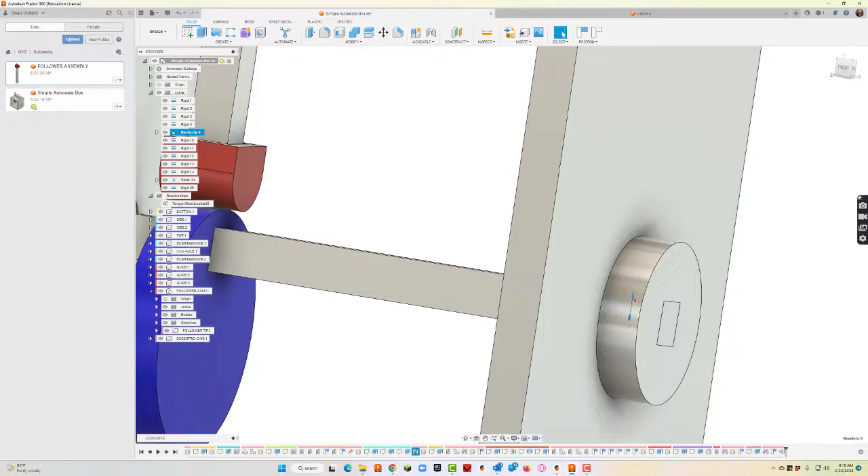Pretty neat. Now if I go over here to my actual joint, and I click on that, I can right click on it here and say, let's go to home position. So right click on it and say, let's animate those joint relationships. And let me zoom out a little bit so we can actually see what we've done. Let's get an ISO view on that. So you can see we've got motion together now, don't we? And that's really what we're after here.

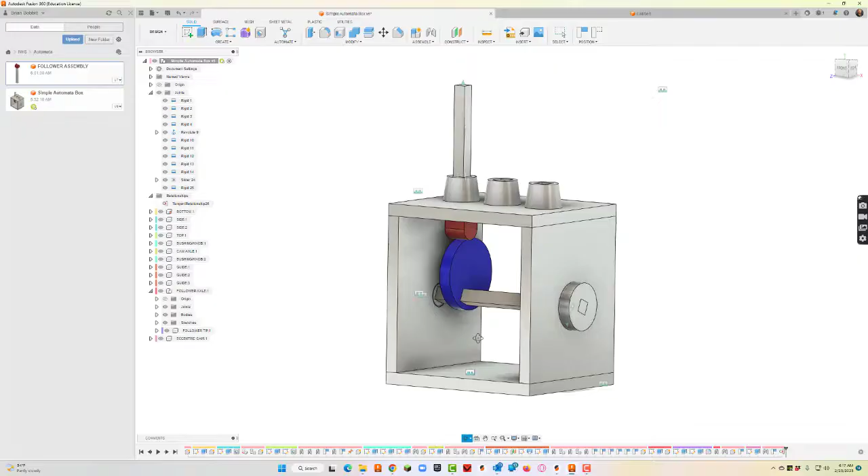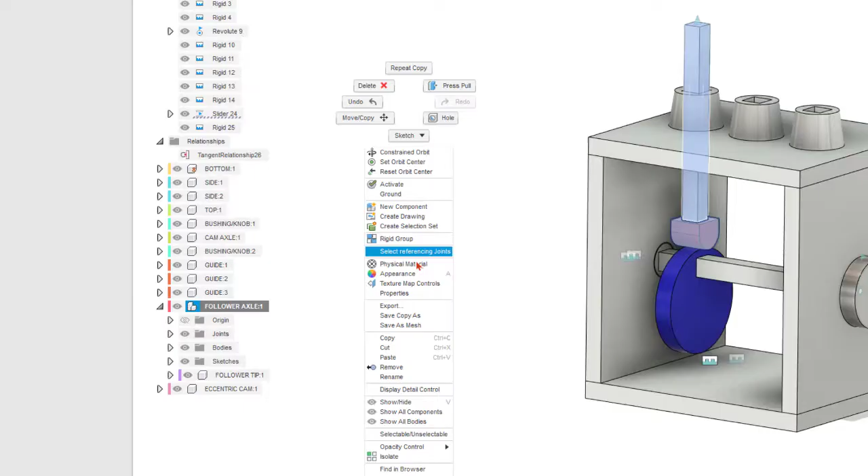So we can repeat that same process for other ones. So let's do one more real quick. So to get out, I'll just hit escape on my keyboard. I'm gonna go ahead and take this follower axle. I'm gonna right click on it and say, let's copy that. And then I'm gonna right click and say paste. So we've got one coming out over here.

So I'm gonna set it up the same way. This will be a joint. So we're gonna go to joint, and I'll say, give me the face here. And let's do control again and get that face there as well. I don't know if you noticed, but that thing flipped over again. So I'm gonna go ahead and hit the flip button. Motion this time will be slider. And it is already moving up and down. Remember, if that's messed up, and it shouldn't be this time because we already made it right, you go to slide and change the axis.

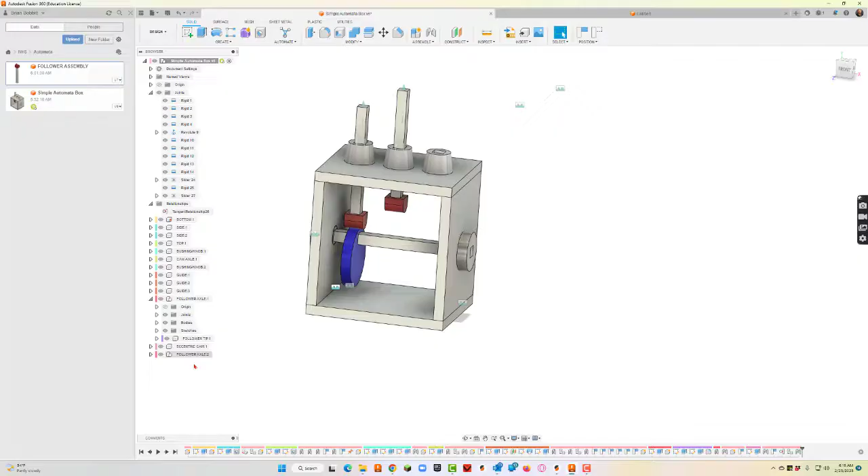Okay, so now if we zoom out here or kind of rotate around where we can actually see it, let's move that up a little bit. And let's go ahead and create one more cam. So new component, and let's do a pear cam. So I'm just going to come out here. I guess I'll start with a circle down here. I'll keep it at 1, and I'll draw another circle kind of at the top here, and I'll make it like 0.5. So it's going to be kind of tiny.

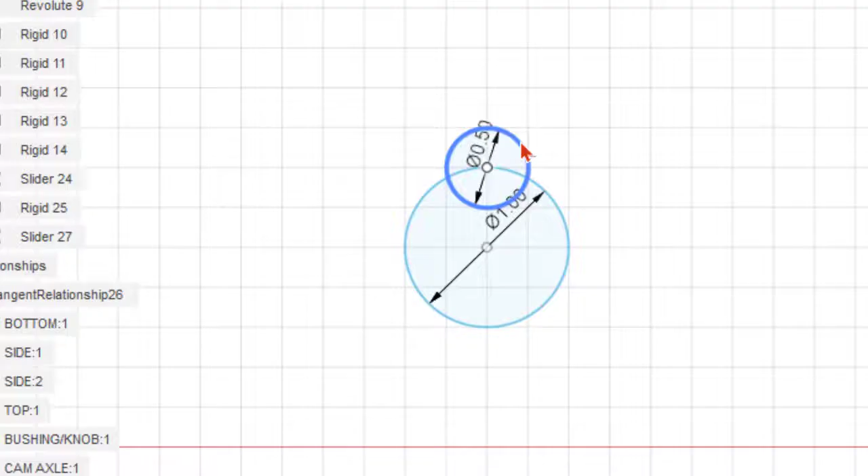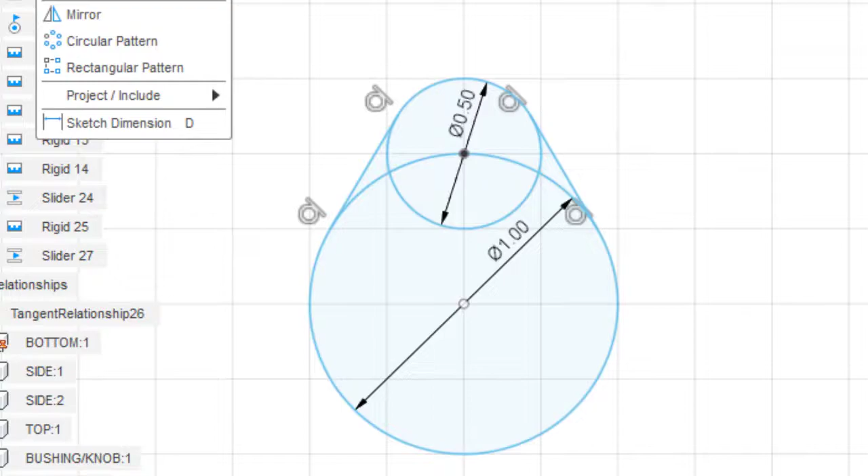And I'll go ahead and connect the lines. And we're making that snowman. Alright, and I'll use the tangent constraint. So let's go here and here, here and here. Basically, I'm connecting all sides. And I'll do one more thing. I've got that rectangle where I'm going to do a center rectangle. I'll come here and just draw it here. By now, I've already used this enough. I'm just going to say 0.27 and 0.27.

And I could, if I wanted to, trim all these extra lines. But I don't really need to. I'm just going to hit extrude and select all these shapes in here. And then I'm going to say 0.25 because I want it to be 0.25 thick. Alright. While I'm here, I'm going to go ahead and change the appearance just to keep it kind of clean. I guess we'll make it green.

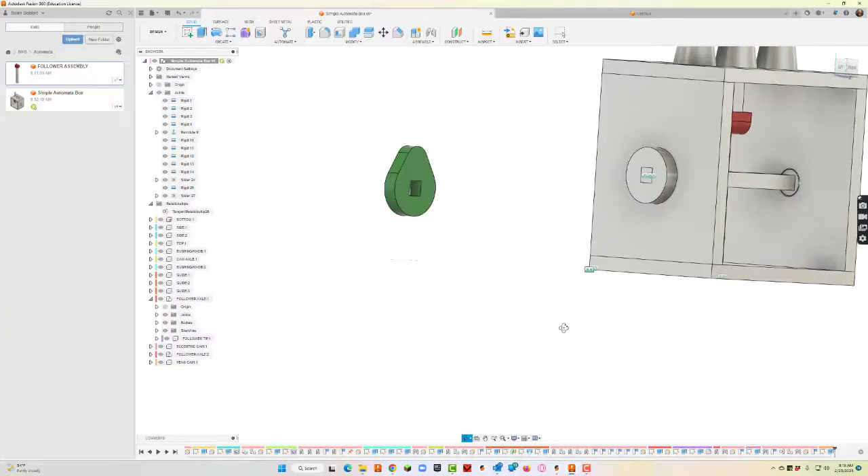Alright, so I'm going to get the entire assembly back on. And it sets up the same way. So I'm going to go to joint. Come in here and hit the control key so I can get the center of that. Here and get the center of the axle as well. Now remember, the last one we used was slider, and that's okay. Right now we just need to put it in position.

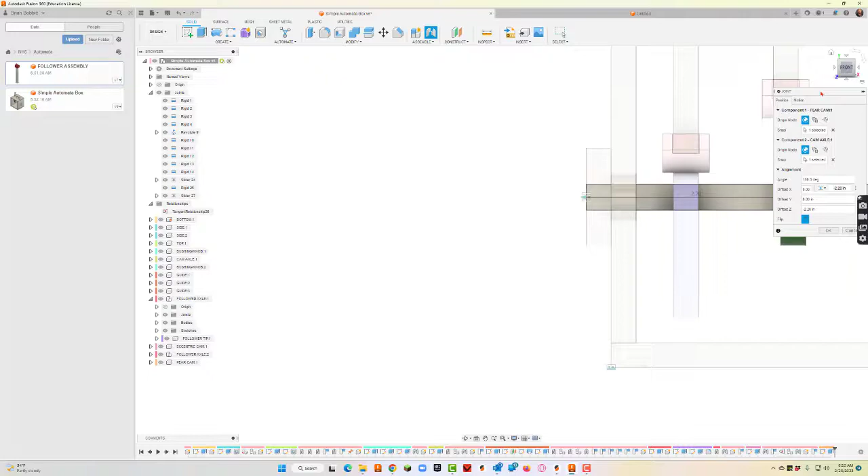So I'm kind of sliding it, and then I'll choose the front view. Got to move some things around, don't I? Let's scoot this back just a hair. Oh, that's so close. Let's try negative 2.125. That looks really good. And I'm going to hit OK.

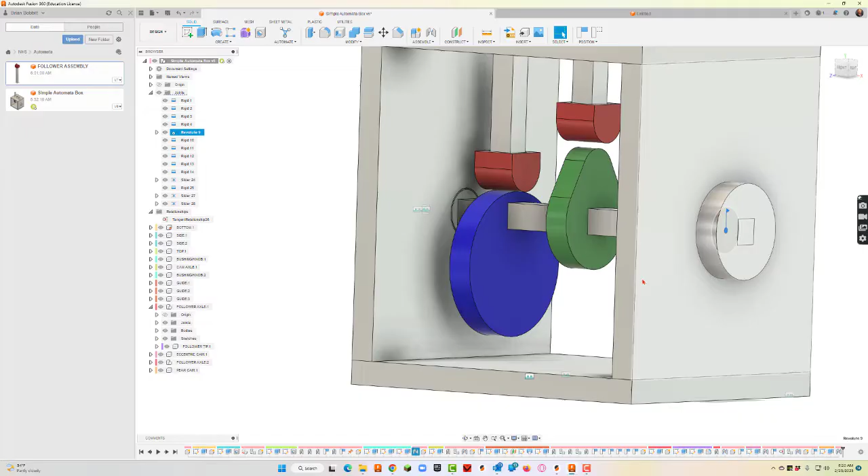Now before I go putting that tangent relationship, I do like to make sure that our revolute is in the home position. And it looks like it is. So what I'm going to do now is I'm going to go up to assemble, and I'm going to use that tangent relationship again. So bottom of the follower, somewhere on the cam. And now we can rotate that and things work.